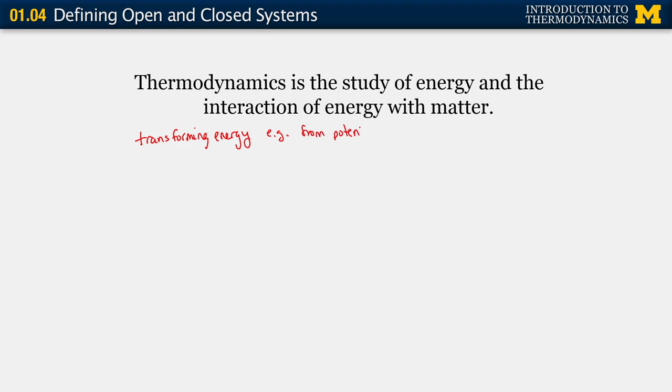Another good example that's relevant to the stationary power sector is a dam. So we know if we have a hydraulic system that the water is elevated before it comes into the dam, and then that water passes through turbines, which are used to spin shafts to generate power, and then they exit the dam at a lower elevation.

So we know there's a conversion of kinetic energy of the water as it's moving through the river, and potential energy because it's at a high height prior to going through the dam, into mechanical energy, which is the spinning of the shaft associated with the turbines. So thermodynamics helps us quantify the transfer of energy from one type of energy, one category of energy, to another.

Additionally, we want to be able to obtain energy, and probably the best example of extracting energy is the example of the dam that we just considered. So, for example, we want to convert that kinetic and potential energy to mechanical work, which we will define in detail, and ultimately to electrical energy as we move further along in the course.

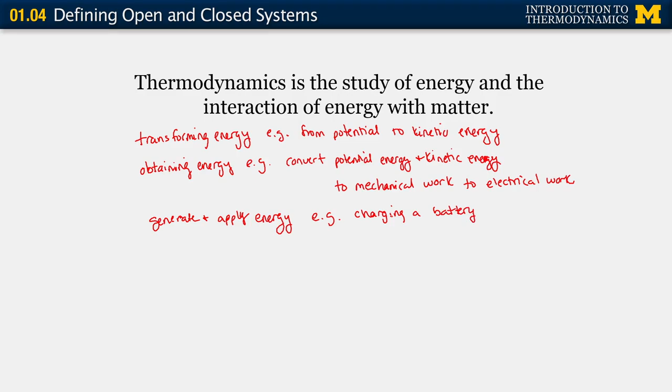And sometimes electrical power isn't the ultimate goal. So in our example of a jet engine, the goal is actually to generate thrust, not to generate power in the conventional electrical energy sense, but to generate the thrust that's necessary to get the jet off the ground.

So again, thermodynamics covers all of these systems, whether your key here is to generate stationary power or propulsion, or whether it might be almost a parasitic loss or a supporting need for whatever your application is. As long as there's energy transfer involved, we have the tools within thermodynamics to analyze the system.

Now, heat transfer is a classic example of where we may not be making a power plant or designing a new jet engine, but heat transfer could be very relevant to our system. So here, heat transfer is very specifically how energy is transferred when there's a temperature difference. So anytime you have two systems that are at two different temperatures, there's energy transfer due to heat transfer.

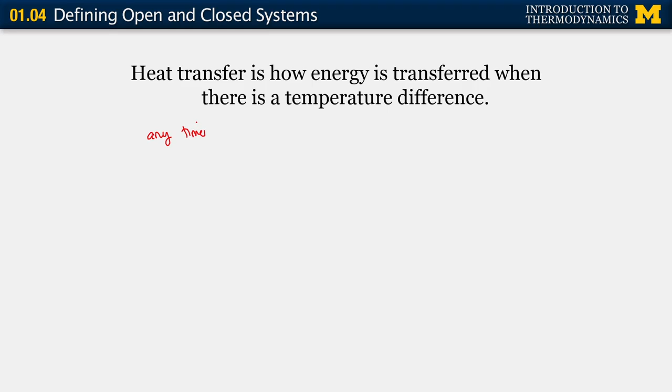So anytime there's a temperature difference... So heat transfer is a form of energy transfer.

So let's just take the classic academic example where we have two bricks, one with mass A and the other with mass B, and they could be the same amount of material or different, it doesn't matter. And we have two temperatures where one is greater than the other. So let's say the temperature of material B is greater than the temperature of material A, and to make our life easier, we'll just assume that the mass of the two systems is the same.

If we bring those two bricks together, we know because there's a temperature difference that there's going to be heat transfer between the two systems. Intuitively, we know that the heat transfer will be from the high temperature material to the cold temperature material. We also know that when the system comes into equilibrium, which it will do, it will reach a thermodynamic equilibrium, and the temperature will be somewhere between the two temperatures of A and B.

So if we bring them together, at equilibrium, the temperature of A will equal the temperature of B. We'll call these the temperatures at the initial state, or state 1, and the temperatures at state 2, or the final state, will be equal. So again, if we see any temperature difference between two systems, we know that there'll be heat transfer. So that's a very easy energy transfer process for us to identify.

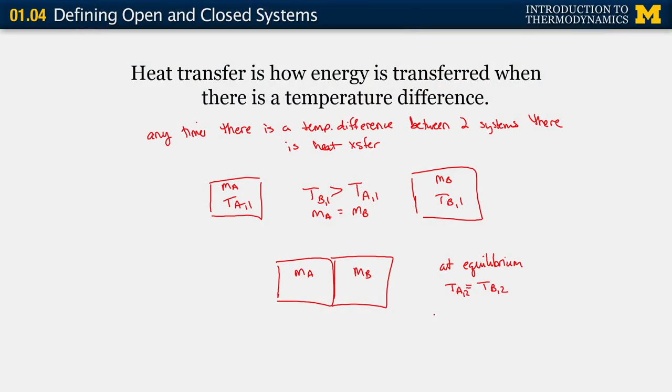Now, there are three types of heat transfer, and there are physics associated with each of those three heat transfer mechanisms. And those three types of heat transfer are conduction, convection, and radiation.

We won't cover the details of the physics of these different mechanisms in this class. We'll just identify whether there is heat transfer present, and we'll quantify it in a general form, but we won't quantify it from first principles based on conduction, convection and radiation. So that's heat transfer. Next, we'll talk about fluid mechanics.

So fluid mechanics is the motion of fluids. When I say a fluid, we don't just mean liquids. A lot of times people will think that's a liquid, but liquids and gases are both in the category of fluids. And it covers the transformation of energy between mechanical and thermal forms. Thermodynamics doesn't consider the details of the fluid mechanics. We only consider the high-level picture associated with energy transfer due to the motion and the processes of fluids.

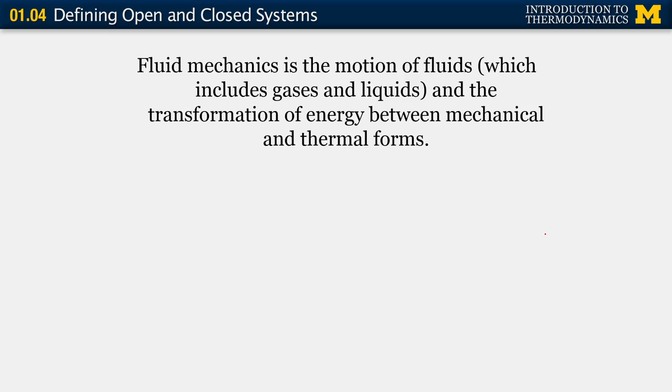So now we need to go through some definitions. It's going to take us a little while to develop the tools and the vocabulary so we can actually do quantitative analysis. So let's start with defining a system. A system is the object that we're going to study, the object under consideration. Closed systems are systems where the mass is fixed. The mass does not vary in the time that we're considering it.

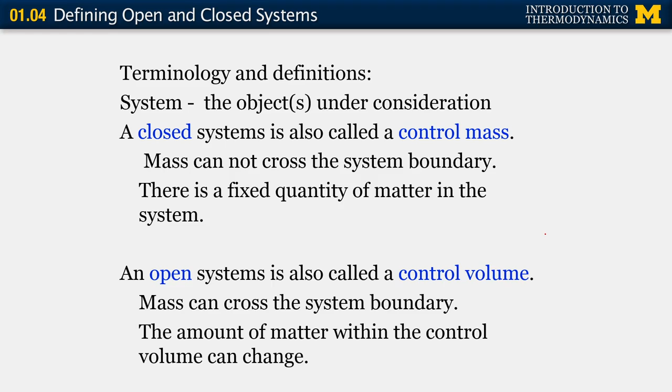So like a brick, if we're considering my brick cooling or my two bricks coming into contact with each other and equilibrating, that's going to be a closed system where there is no mass crossing the system boundaries. An open system is one where mass can cross the system boundaries. A great example of an open system would be your garden hose. Let's say you're directing water through a fire hose or a garden hose. The water enters one end of the hose and exits the other end. So that would be an open system.

So what I want you to think about right now is a system that's maybe your coffee mug. If you consider the coffee inside your mug, maybe we're going to do a heat transfer analysis to see how long it takes for my coffee to cool. Would that system be best described as an open system or a closed system? So I want you to think about that.

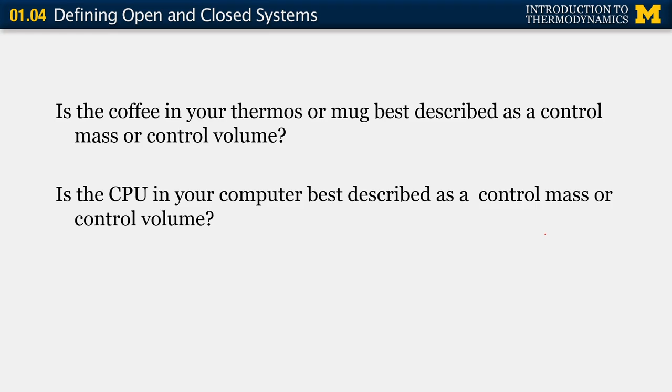And the other example I want you to consider is the CPU, the brain, if you will, of your computer. Is that best described as a control mass or a control volume, as an open or closed system? So next time, we'll review the best way to approach these from a thermodynamic standpoint, and whether they should be considered open or closed.